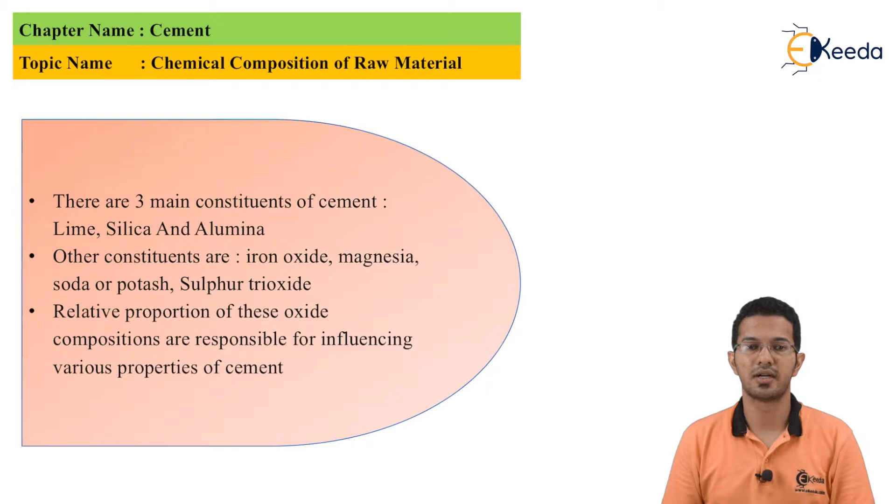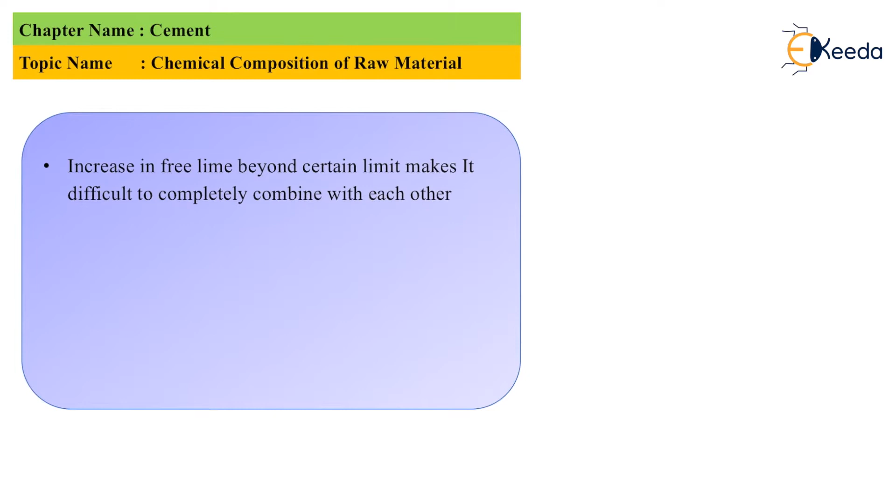Basically, cement comprises three main constituents: lime, silica and alumina. There are others also, but their concentration is so minor that their effect on the properties of cement is either adverse or negligible. But care has to be taken to control them, like iron oxide, magnesia, soda or potash, sulfur trioxide, etc. The relative proportioning of these is the reason for the properties of cement like setting time.

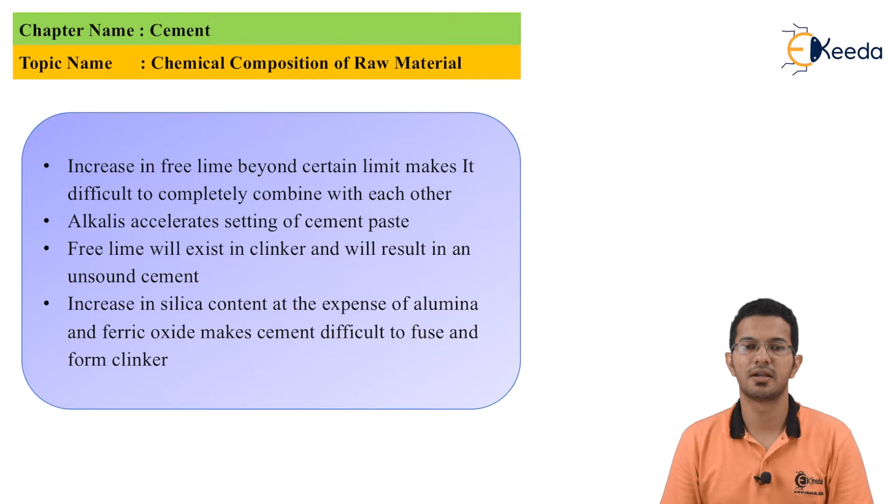Following are some examples: an increase in free lime beyond a certain limit makes it difficult to completely combine with each other. The alkalis accelerate setting of cement paste. Free lime will exist in clinker and will result in unsound cement. Increase in silica content at the expense of alumina and ferric oxide makes cement difficult to fuse and form clinker.

As you have been told earlier, there are various types of cement. Now you have learned enough to be told that these types of cement are nothing but the results of modifying the proportion of any one or more constituents with respect to each other, so as to gain our desired properties. We will discuss the basic one, that is Portland cement.

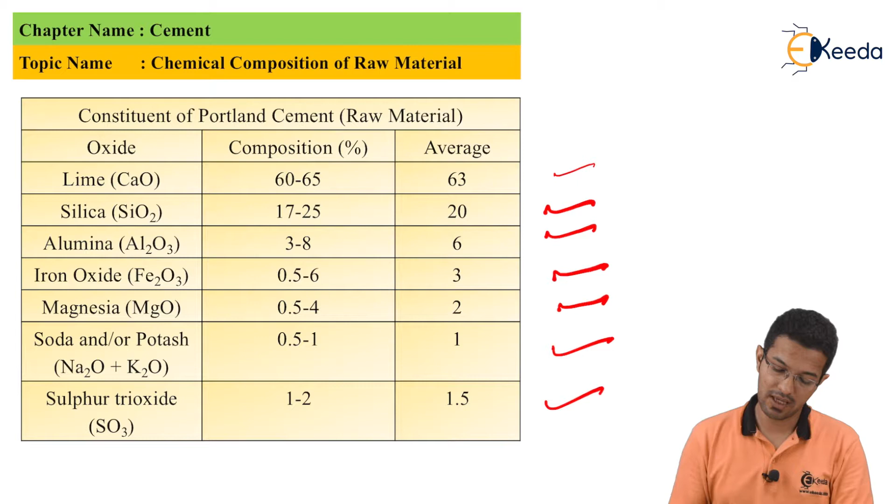In Portland cement, the lime or CaO makes up 60 to 65% of the Portland cement, an average of 63%. The silica, SiO2, has an average of 20%, whereas alumina is 6%. Also, iron oxide is 3% and magnesia is 2%. Soda or potash is 1%. The sulfur trioxide has an average of 1.5%. So these constituents make up the chemical composition of Portland cement.

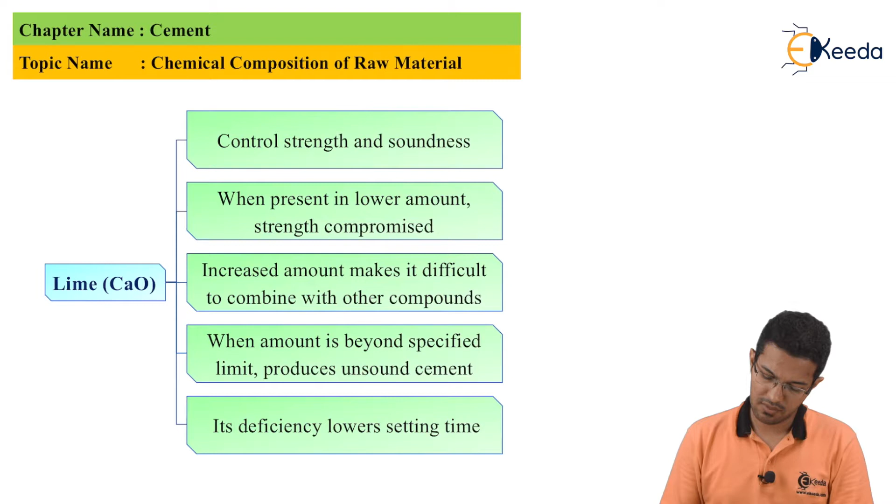Now, after the constituents, we will discuss their effects on the properties. Firstly, lime. It is very crucial because too much lime will cause the cement to be unsound, expand and disintegrate, and its scarcity will lead to a decrease in strength and make it set very quickly. Lime, also known as CaO, provides strength and soundness to the cement. The deficiency of lime makes the setting time lower.

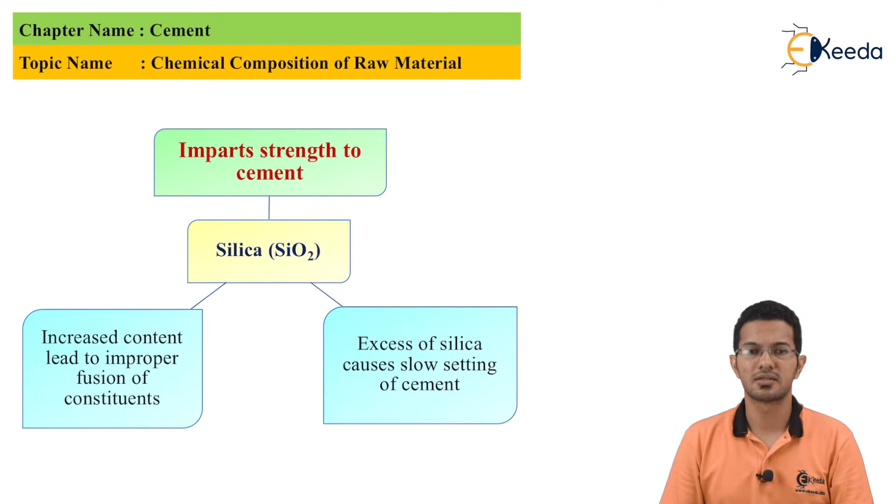Now, let's talk about silica, which is SiO2. This is also an important ingredient of cement as it gives strength to the cement due to the formation of dicalcium and tricalcium silicates. In excess, it increases the strength but also increases the setting time.

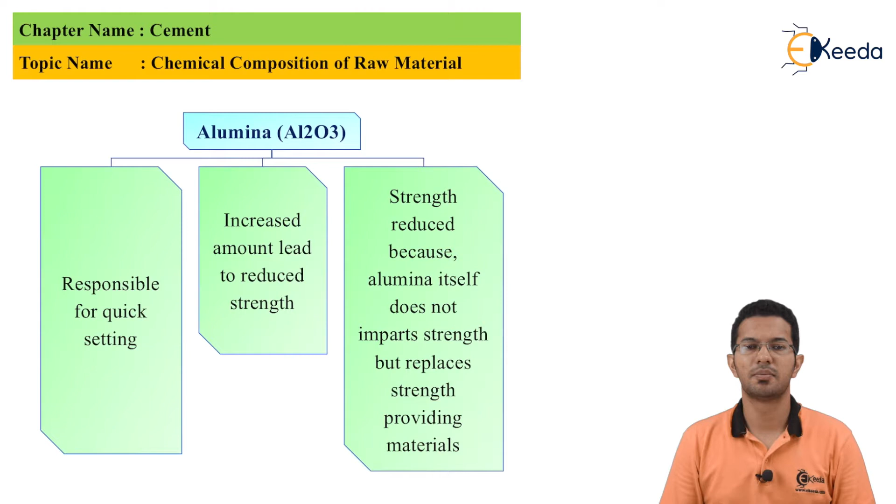Now, let's talk about alumina, which is Al2O3. It imparts quick setting to the cement. It acts as a flux and it lowers the clinkering temperature. However, the high temperature is necessary for the formation of suitable types of cement. Hence, alumina shouldn't be present in excess as it weakens the cement.

Now let's look at iron oxide. Iron oxide, when heated, melts easily. Hence, the main function of iron is acting as a flux, that is, it helps in the fusion of different ingredients. Also, iron gives color to cement. If present beyond a specified limit, it hardens the cement.

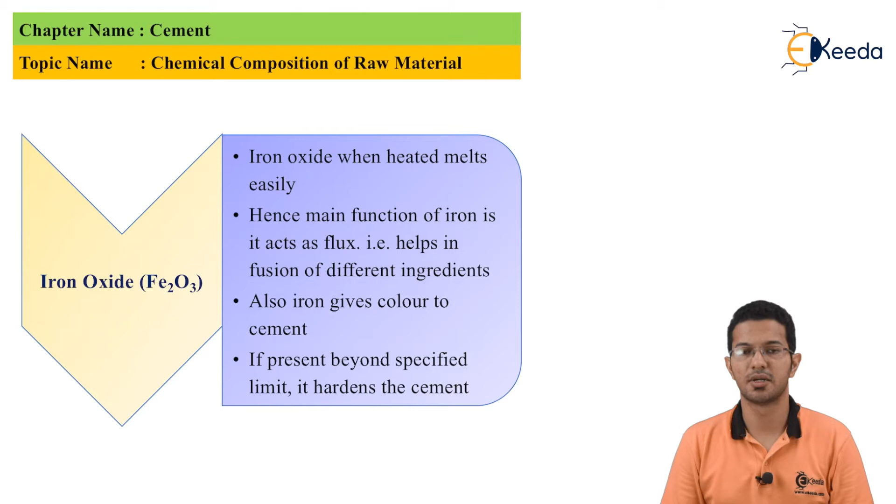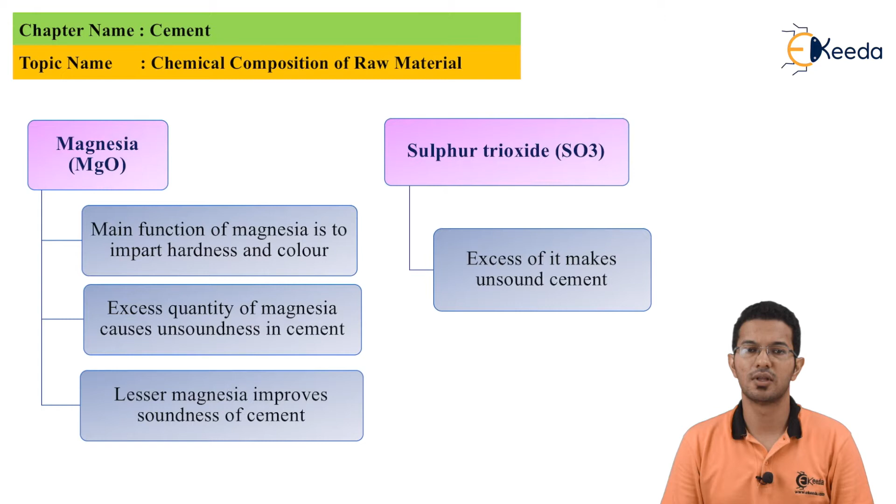Now we'll talk about magnesia or MgO. The main function of magnesia is to impart hardness and color. Excess quantity of magnesia causes unsoundness in the cement. The lesser the magnesia, the better the soundness of the cement. Also, sulfur trioxide, which is SO3: excess of it makes the cement unsound.

Now let's look at soda or potash, which is Na2O plus K2O. These are impurities which arise from shale, clays or fuel used in the manufacturing of cement. Excess alkali reacts with gypsum, which is used to prevent flash set. If present in amounts beyond a specified limit, it causes efflorescence and cracking.

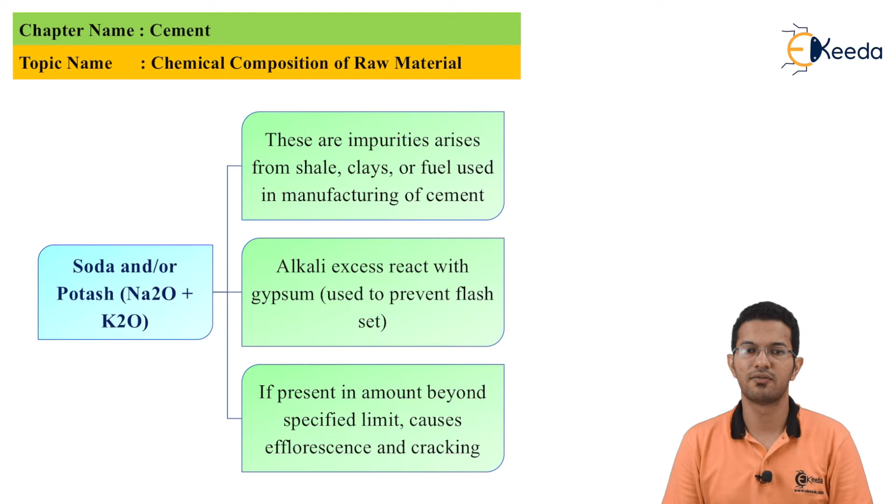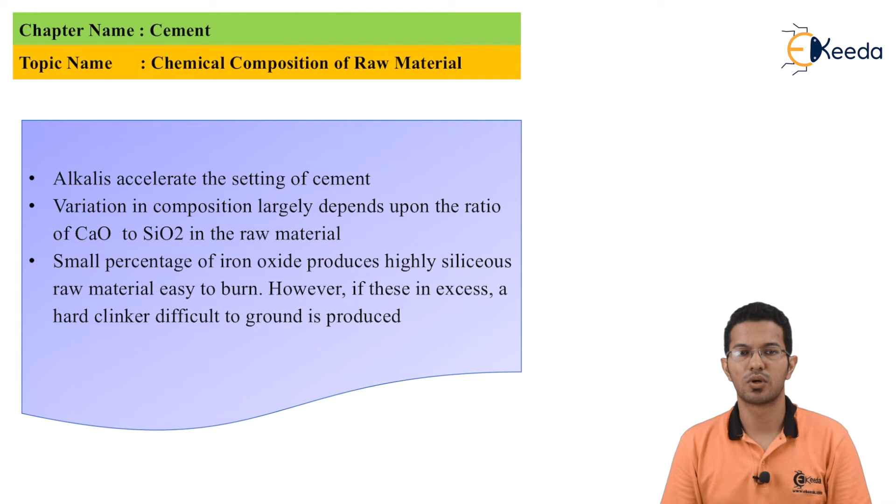Now let's look at alkalis. Most of these are carried away by gases during heating, and cement retains a very small amount. In excess, they cause a lot of problems like efflorescence, alkali aggregate reaction, and staining when used in concrete, brickwork or masonry mortar. Alkalis accelerate the setting of the cement.

The variation in composition largely depends upon the ratio of CaO to SiO2 in the raw material. A small percentage of iron oxide produces highly siliceous raw material which is easy to burn. However, if these are in excess, a hard clinker which is difficult to grind is produced.

Now let's look at some additional info about the constituents. The rate of setting of cement is controlled by regulating the ratio of SiO2 to Al2O3 plus Fe2O3. When heat of hydration is undesirable, silica content is increased to about 21% and the alumina and iron oxide contents are limited to 6% each.

Resistance to sulfate water is increased by raising the silica content to 24% and reducing the alumina and iron content to 4% each.